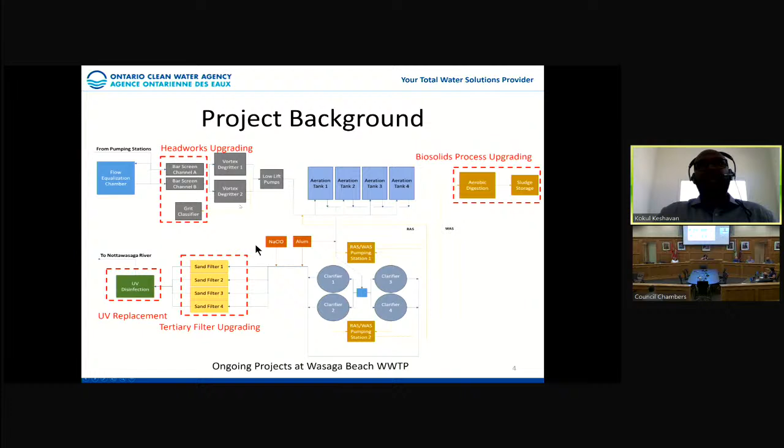So the boxes you see outlined in red here are ongoing projects at Wasaga Beach. The goal of these projects is to replace any old equipment with new equipment, and also ensure that the equipment meets the rated capacity and the future needs of the plant.

The first task was a site visit and collecting the background information that's needed. Once we had all the data, we did a plant assessment to assess the existing condition and capacity of all unit processes. Then we developed a roadmap for the next 30 years, from 2021 to 2050. That was summarized in a report, and today I'm giving you a presentation just to highlight the key findings from the study.

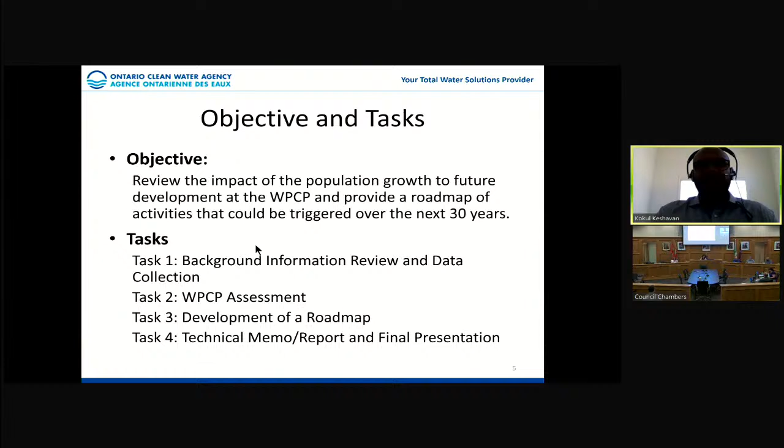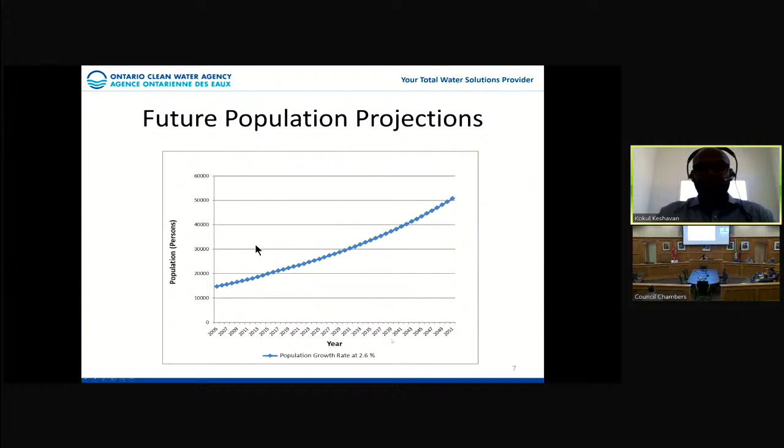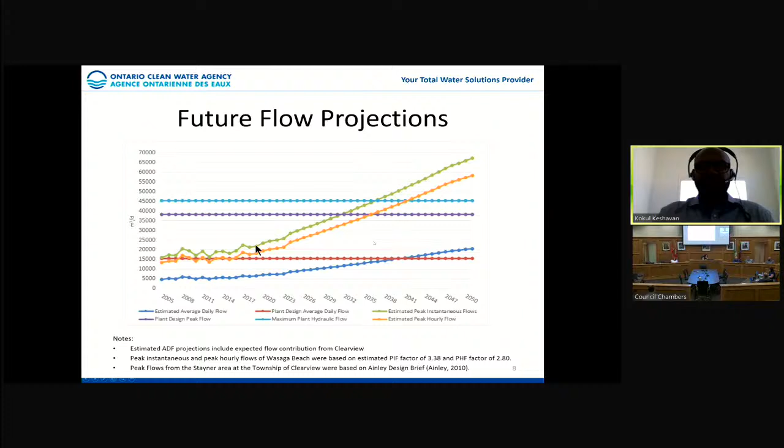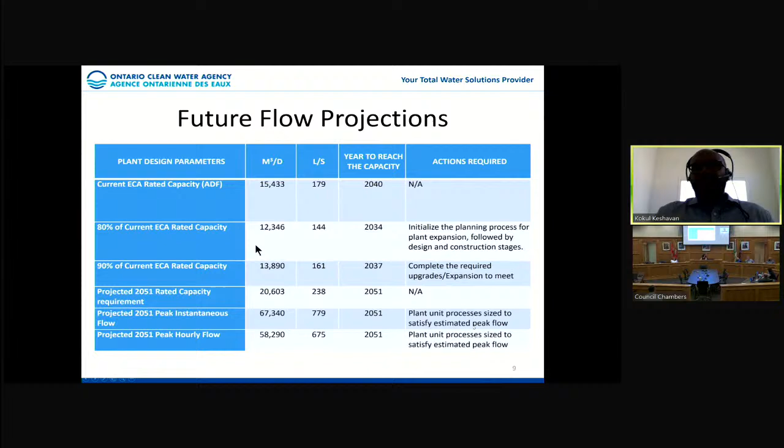The rated capacity in 2051 is expected to be just over 20,000. The peak instantaneous and peak hourly flows in 2051 are expected to be about 67 and 58 MLD respectively. So it's important to ensure we're sizing the downstream processes in the plant for these peak flows.

Peak flow reduction considerations: since there are such high peak flows at Wasaga Beach, we've done some consideration to reducing these peak flows and not oversizing downstream equipment. Primarily we'll be doing that through utilization of the flow equalization tank. There's one existing at Wasaga Beach, about 2,000 meters cubed, currently not being used for flow equalization. However, the purpose of this tank is...

If there are peak flows coming into the plant that the downstream unit process can't handle, it would divert the flows into this tank, and the flows would then be sent back into the plant during low flow demand periods. So this acts as peak shaving.

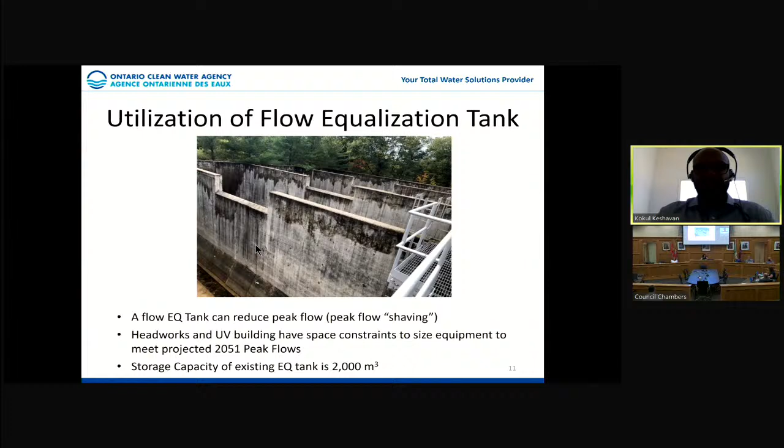There are a few projects ongoing right now, specifically the headworks and UV system upgrades. We're involved with CIMA for the design stages, and during the design we realized there are space constraints to size this equipment to meet that 2051 peak flow requirement. Because of that, SEMA looked at two options, which were reviewed by OCWA.

The first option would be to divert flows over 67 MLD to the flow EQ tank. That 67 MLD comes from the estimated peak instantaneous flow in 2051.

Option 2 would be to divert flows over 46 MLD. This was chosen based on SEMA's review during the design stages—this is the max capacity we can put in for the UV system with the available building space, and also the headworks 46 MLD screens are recommended based on space constraints as well.

We looked at these two flow scenarios, and what we did was look at the max flow day event in 2021, which was in September, and projected that into 2051 to simulate how flows would look and how the existing EQ tank would hold up.

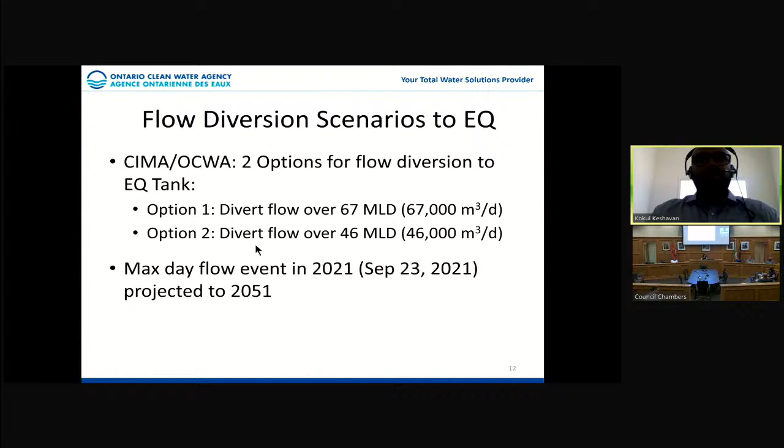Remember, we have a 2,000 meters cubed equalization tank, so there would be no issues here. However, we would have to incur high costs to have very large screens and UV systems, and also some building modifications to account for those.

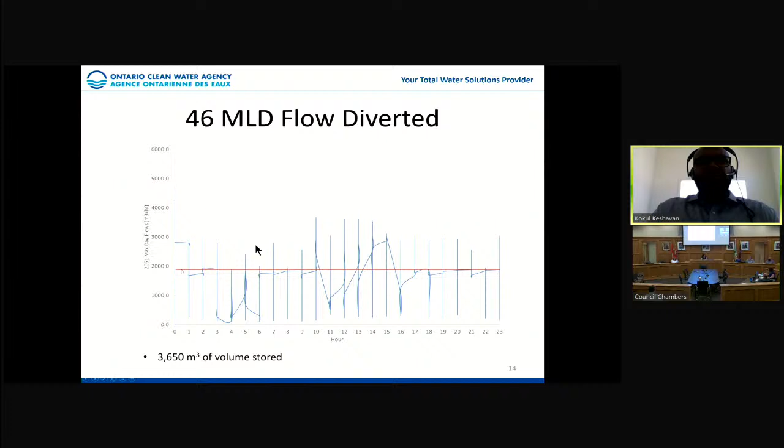Looking at the 46 MLD scenario, you can see the threshold is a lot lower, so there's a lot more flow that needs to be diverted. In this scenario, 3,650 meters cubed of volume was stored in the tank, which is greater than the 2,000 we have available. So in this option 2 scenario, we would require an EQ tank expansion.

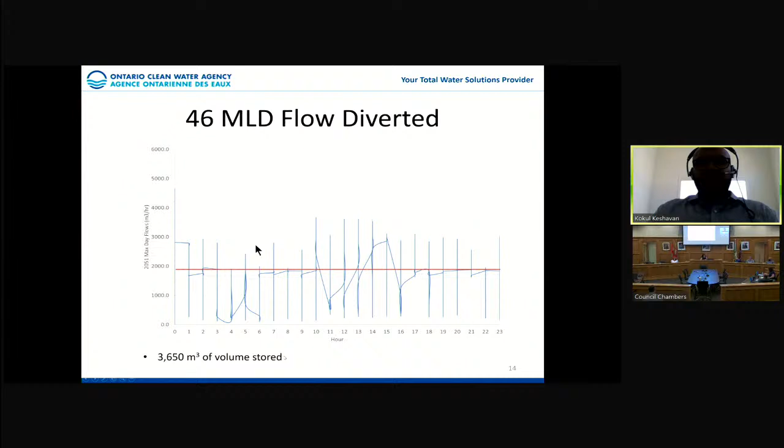So ultimately, we've decided to go with utilization of the equalization tank and diverting flows over 46 MLD. The reason being, as I mentioned, the UV system max capacity is 46 MLD. We've discussed with the designer CIMA and also Trojan, the supplier.

If we want to go anything beyond this, we would have to create a parallel channel, which would require some trenching, and then we would need to do a building expansion to house that channel. So quite a bit of cost associated with that.

CIMA recommended option 2 because the size for the headwork screens, based on the channel depths and the configuration of the headworks, 46 MLD having 2 screens like that is optimal. Going any bigger would require serious modification of the channel and the building.

So we've been approved to go ahead with option 2 for diverting flows over 46 MLD, and our roadmap study is actually based on this direction. Essentially, peak flow shaving allows for reduction of downstream unit treatment processes, leading to significant cost savings.

So the idea is to spend some money on the EQ tank, expand it, and utilize that. Spending that money would be cheaper than purchasing large equipment for the UV and the headworks, and also the significant building modifications that are required.

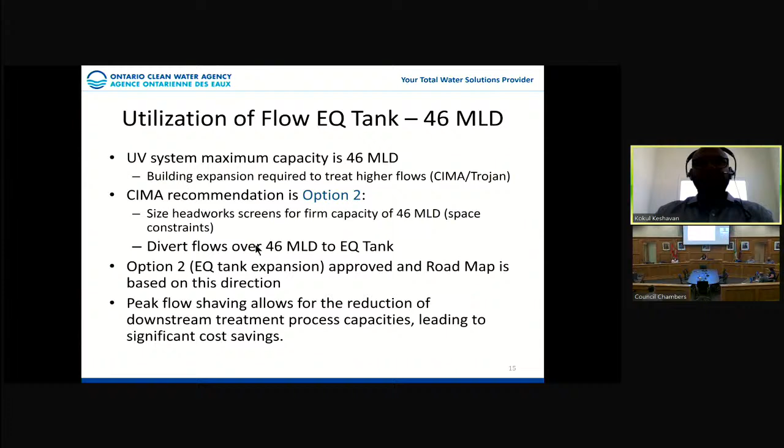So, treatment process capacity evaluation. Here we have a performance potential graph of the existing conditions at Wasaga Beach before any of the upgrades were complete. I'm sure a lot of you have seen these graphs in the past, but what we have here on the y-axis is each unit process, and on the x-axis is the flow in meters cubed per day.

What we've done is converted each of the individual unit processes to be equivalent based on average daily flow, so we can compare apples with apples, and compare each unit process with the rated capacity of the plant. The dotted line here is the last 3 full years of average day flows.

The red line is the rated capacity of the plant, which is about 15,400. The blue line here is what our projected 2051 design flow would be. Rated capacity is just above 20,000.

So looking at this, you can see the initial bottlenecks of the process currently are the tertiary sand filters and the aerobic digestion and sludge storage. We're actually doing 2 projects to address these right now.

Actually, the sand filter project, both of these 2 sand filters have been replaced and put into new disc filters, which has increased the capacity. So now that actually meets the rated capacity here.

And we're also doing a biosolids upgrade in 2 phases. The first phase will bring these to meet somewhere around 2031, and the second phase will have to be conducted to meet the rated capacity and the rest of the design.

Looking at the rest of the graph, you can see the bar screens we're going to be replacing because the existing ones are old. So that's an ongoing project in design stages. So this will be satisfied.

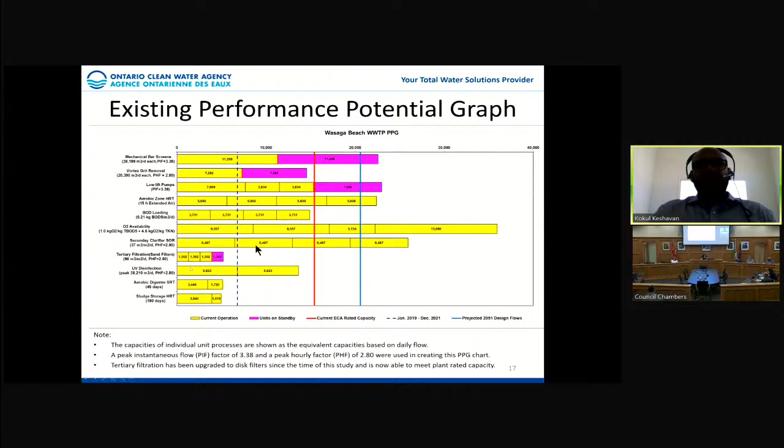So based on that, here we have a bird's eye view of the ongoing and proposed projects happening at Wasaga Beach. Everything in purple is ongoing, including the headworks bar screen replacement.

In this building we have the disc filters recently installed, and also the UV system that we're going to be replacing. Here we have the biosolids upgrade going on, where we're converting some of these sludge storage tanks to aerobic digesters and introducing sludge dewatering.

In the future, we can expect an additional sludge storage tank to meet the 180-day requirement. We're also looking at expanding this EQ tank and utilizing it for flow diversion control, so it can be used on a full-time basis.

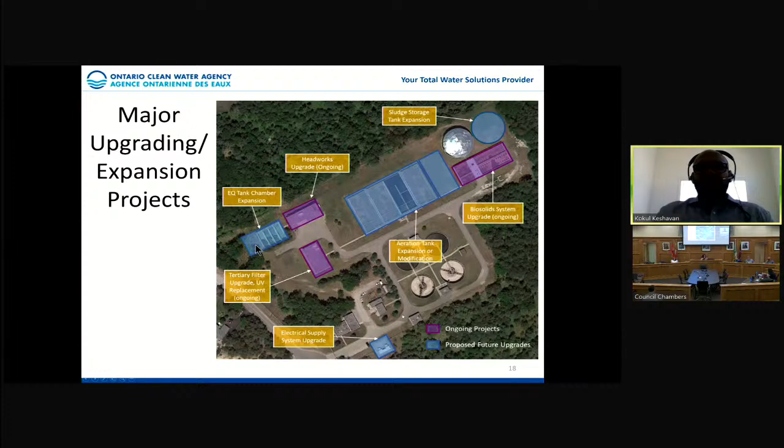For the aeration tank, we'll likely need an extra tank during the plant expansion to meet that BOD loading. Importantly, we also have the electrical supply system upgrade — as we put in these new technologies, we need to ensure the feed system can handle the electrical demand, and that the standby diesel generator is sized accordingly with all essential loads tied into it.

So, roadmap analysis and proposed timelines. Essentially, from our report, this is a summary of all the key projects and studies we're recommending to complete over the next 30 years.

The projects highlighted in pink are the ongoing projects, which I've already touched on, so I won't go into too much detail there.

Starting from the left, one project we recommend is automating the WAS pumps, and we should do that as soon as possible. Currently the pumps are manually wasted, so putting them on VFDs with automatic wasting would provide better control of the secondary system.

We also have a few studies recommended. I touched on the electrical system capacity study — we want to study what future generator we need and any electrical system upgrades based on these project trajectories.

We also recommended a study on the aeration and secondary clarifiers — just a tracer study based on our site visits and data collected. We suspect they may be short circuiting, so this is a small study to address any short circuiting concerns.

We also have an optional biosolids management optimization study. This is to evaluate different biosolids treatment options — a technical analysis, life cycle costs, and comparison of alternatives for converting biosolids to resources.

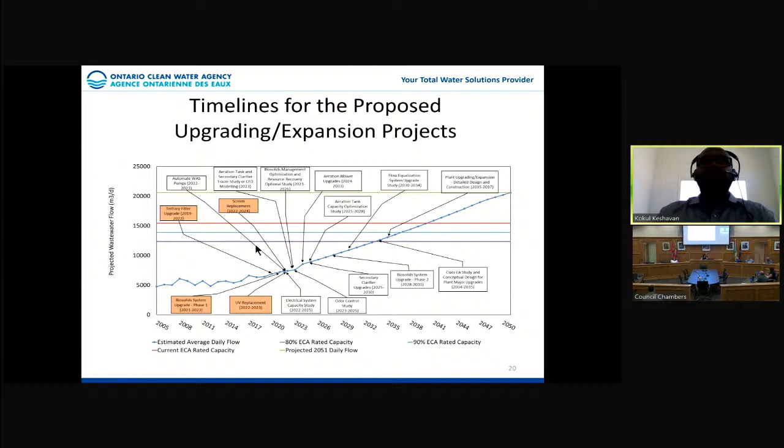So projects to meet the 2051 flow requirements - that's going to be the plant expansion project. In 2034 to 2035, we will be doing the Class EA and conceptual design for the plant. This is the procedure and studies that need to take place, typically costing around $200,000 to $350,000 in today's dollars, depending on the overall scope.

Once this Class EA and conceptual design is approved, we can start the detailed design shortly after, around 2035, and plan to have construction completed around the end of 2037.

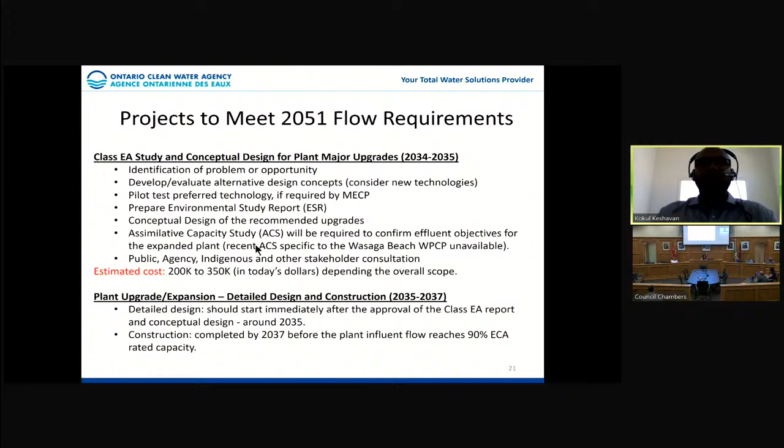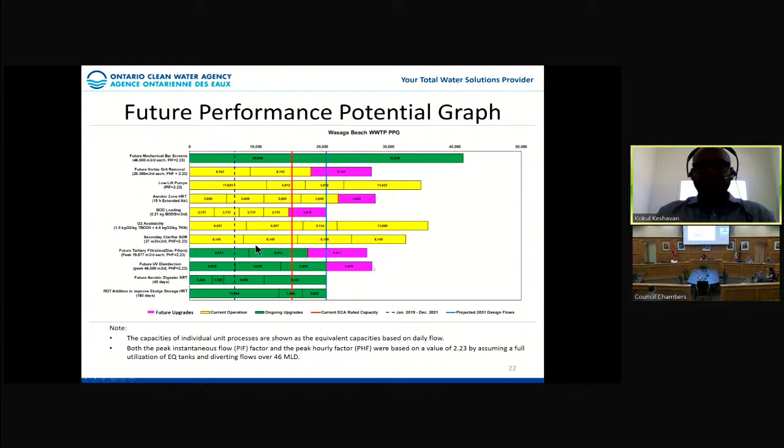So now this will be going over the equalization tank versus no equalization tank and the advantages. Here we just have the unit processes affected by peak flow - that's the headworks, vortex grit removal, low lift pumps, disc filters, and UV disinfection. Here we just have the capacities based on ongoing projects and what's existing there.

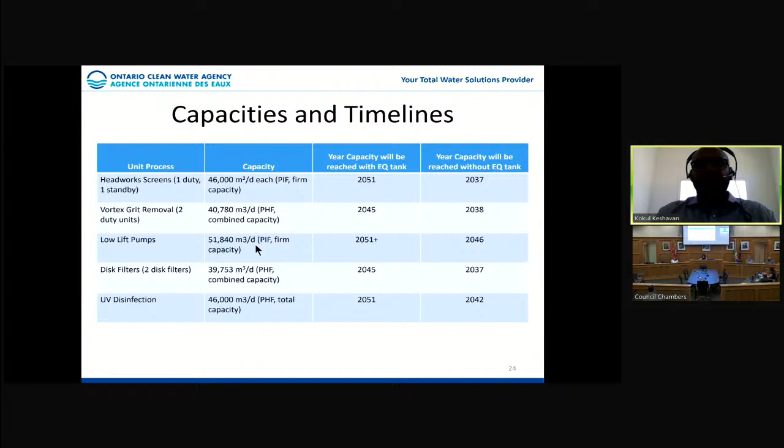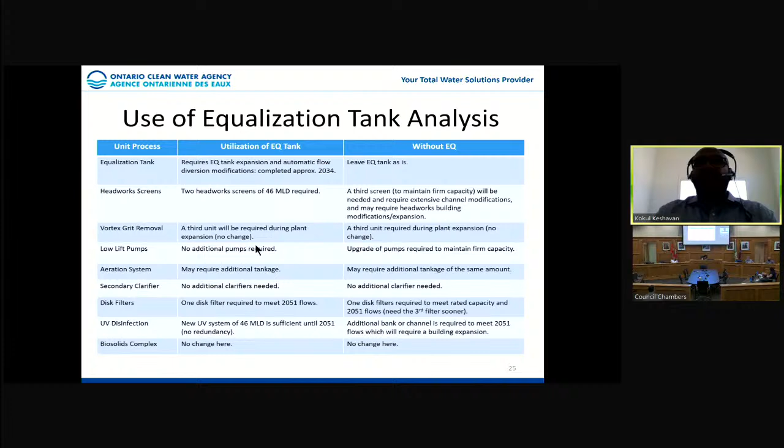So you can see the advantages of using an EQ tank in terms of timelines. This table here goes through each unit process and describes the benefits of what happens when you utilize the EQ tank versus not utilizing the EQ tank. However, for time's sake, I won't go through this. It's summarized well in this graph, where we have a magnitude of total cost comparing the EQ tank versus no EQ tank.

Everything in blue here is the total cost if you're utilizing the EQ tank. Everything in orange is what we see if we're not utilizing the EQ tank. So you can see if we use the equalization tank, there will be some costs associated with expanding it and allowing it for flow diversion control. However, on the headworks side, we're saving about 100% cost because of an extra channel and an extra unit that's required in some building modifications.

In terms of the vortex grit removal, there's no changes there - we're going to be needing a third one for the plant expansion. Low lift is a slight extra cost - if we don't have a tank, we need to convert one of those smaller pumps to a bigger pump to keep up the capacity. Disc filters, there's no change here, we'll need a third one regardless. It's the timing of when you need one that's a little bit different.

The big one here really is the UV disinfection that I mentioned. By utilizing the EQ tank, we're good for 46 MLD up to 2051. If not, around 2042, we would need to do a building expansion to build a parallel channel. So you can see the headworks and the UV disinfection - that's where the higher costs are.

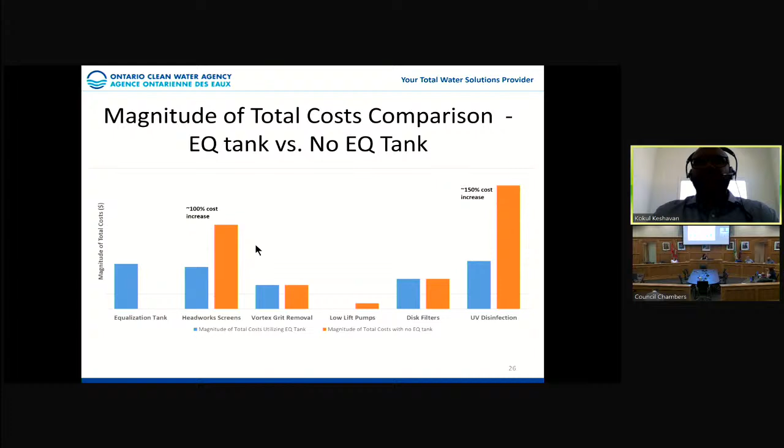I didn't put any specific numbers towards this just because the scope's not really defined at the moment without doing some studies. Also, we've been seeing some price escalations and market volatility - as of recent, you may all know, the cost of raw materials have been going up for metals. Seems to have calmed down, but we're also seeing fuel costs at historical highs. Due to all these combinations, the market volatility and inflation combined makes it very difficult to assume project costs at the moment.

So in summary, the bottlenecks of the process are the tertiary sand filters, aerobic digester, and sludge storage tanks. Completion of these ongoing projects will allow these key processes to meet the plant rated capacity requirements, except the aerobic digesters, where a second phase of the biosolids project needs to take place.

We proposed several studies. These studies will be recommended to be completed within the next 5 years, to help enhance plant treatment performance and also provide a good design basis for future plant expansions.

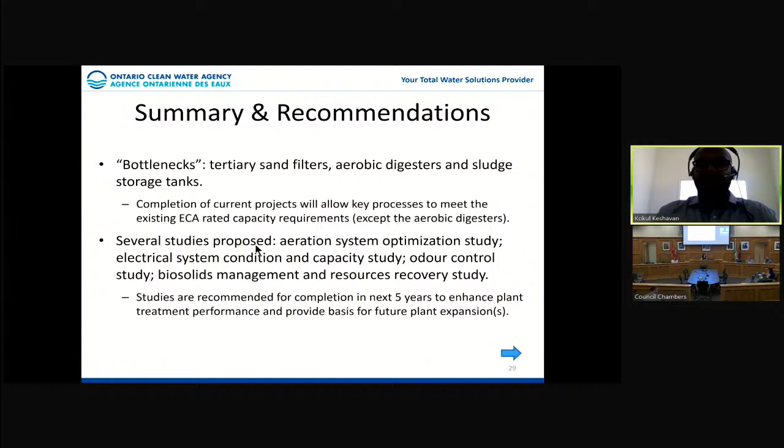Looking into the future, all major unit processes except the low lift pumps and secondary clarifiers have insufficient capacity to treat projected flows to 2051. So a Class EA and conceptual design to upgrade the plant should take place around 2034 to 2035 or earlier, depending on the population growth rate we see. The detailed design and construction should be completed around 2035 to 2037.

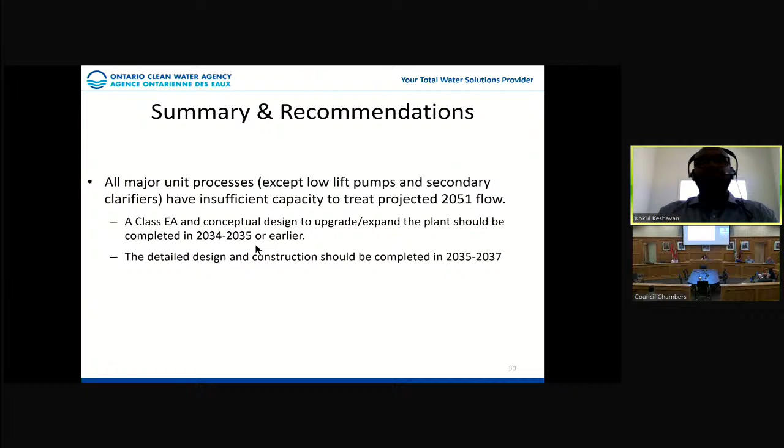That concludes the presentation. That's pretty much the summary and the highlights of that roadmap study. I'll just open the floor to any questions or clarifications you guys may have.

Thank you, Mr. Keshavan. It's hard to make wastewater exciting, and you did a great job. So I will open it to questions from the floor.

Councillor Belanger, please. Yes, thank you very much. I think a lot of us take our water and wastewater somewhat for granted. It's unfortunate that we can't get this kind of information to all of our residents because it's certainly complicated and costly. Thank you for a very detailed presentation. I do have just a couple of questions.

The 2034 year is proposed for starting the EA study and then the detailed study after. Is there any merit, given available grant funding—because we never know in any given year what grants become available to us, whether for planning or construction—that if there was an opportunity earlier, would we be in a position to do those studies earlier with other levels of government supporting that? And if those studies are done earlier, I'm assuming they probably need to be done to qualify for grant funding for actual construction. So I'm just asking about the flexibility—is the timing critical to what you need to plan, or could the plan be done earlier? Thank you.

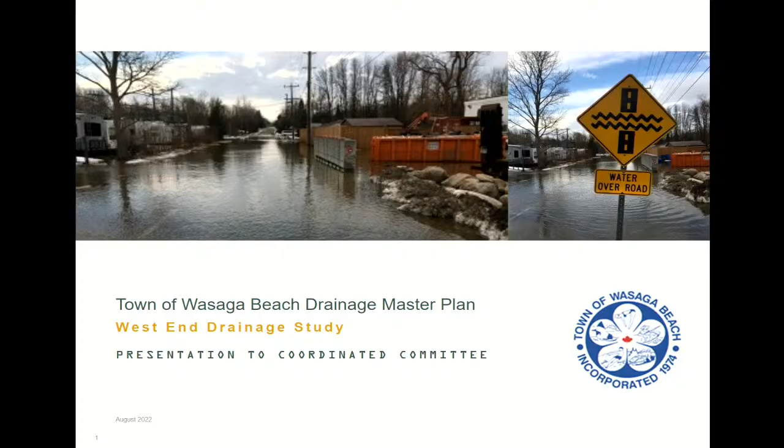I think we're all aware that there's been some historic flooding issues in the west end of the town, and during the October 26, 2021 council meeting, these issues were brought to council's attention. There was a deputation and a petition presented that identified and presented the flooding issues along Marilyn Avenue, George Street, Beachwood Road, and Robert Street.

In the petition, it was identified that there were 4 occasions of flooding over a 21-month period between January 2020 and September 2021, and 46 of the local residents signed the petition requesting that council assist with the resolution of the drainage deficiencies in the area, as well as the flooding that has been ongoing for some time.

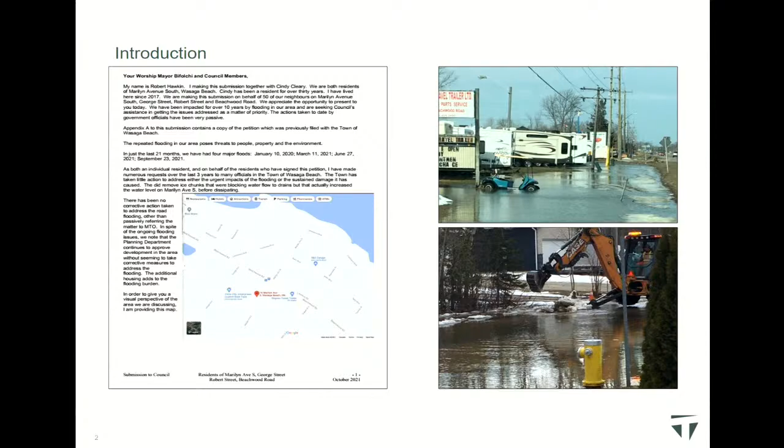In response to this, the town retained Tatham Engineering, who were currently completing the ongoing Master Drainage Plan for the town. The town retained us to further assess the existing drainage issues in this area, identify the extent of the flooding that is occurring, and develop solutions to address these deficiencies.

Following an approach recommended by the Nottawasaga Valley Conservation Authority, we developed models that predicted flooding consistent with the photos and reports presented by the public, as well as flooding that Tatham staff and town staff have witnessed on site in the past few years.

Essentially, Beachwood Road forms a barrier or an obstruction, a dam for lack of a better word, that restricts flows. Beachwood Road is higher than the lands to the south. The centerline profile grade is higher than the grades on private property, as well as Robert Street, Marilyn Avenue, and George Street. And the culverts that cross Beachwood do not have sufficient capacity to convey all flows downstream.

So during spring freshet and major storm events, water essentially backs up or builds up behind Beachwood Road, uses the existing ditches, and spreads out and floods the low-lying areas along these streets and along the properties south of Beachwood. Unfortunately, the conveyance systems downstream of Beachwood also have limiting capacity, and we see flooding along Constance Boulevard and private properties between Constance Boulevard and Georgian Bay.

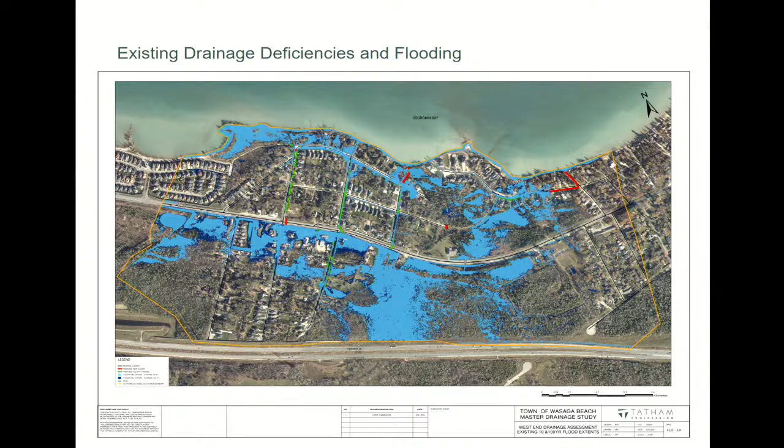As part of our analysis, we evaluated a number of options, a series of options, to try to come up with the best solution to identify and rectify the drainage issues and the flooding that is ongoing in this area.

Not only that, but in consideration of a number of ongoing studies in the area, including the West End Depot project, the Shore Lane Drainage Improvement Project, as well as the Constance Boulevard Drainage Improvements Environmental Assessment, we developed a series of recommended or preferred solutions and prioritized them in a list for implementation. They'll be presented on the series of maps I'll present next.

Our phase one is to improve the system along Marilyn Avenue South. Marilyn Avenue South does not have a proper drainage outlet at this point. Water tries to drain both east and west through the roadside ditch on the south side of Beachwood Road, but the ditch is fairly low sloped and undulating and doesn't have the positive grade to the nearest outlet. So to try to improve the drainage in this area, we're recommending that an outlet be constructed under Beachwood Road to the downstream conveyance system along Marilyn Avenue South.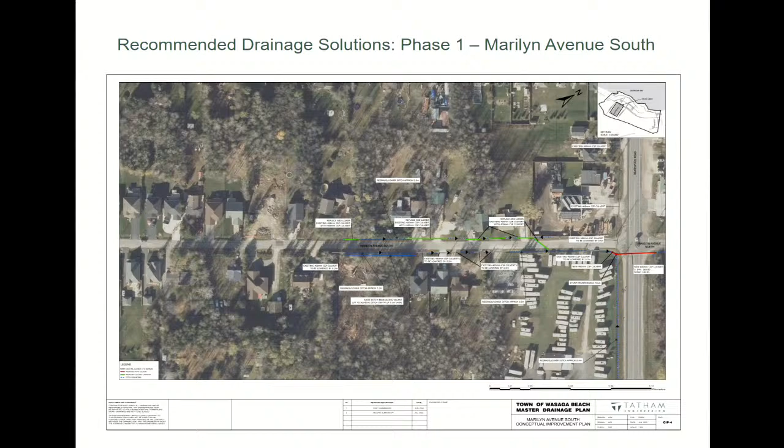Regardless of the outlet options, we're still recommending improvements to the ditches, roadside driveway culverts, and roadside ditches to improve drainage conditions, provide positive fall, and reduce flooding. This is still part of phase one works, because we'd recommend starting from the downstream end when doing drainage improvements and working your way upstream, to make sure downstream drainage systems have the capacity to convey flow from upstream improvements.

If we proceed with the minimum size MTO culvert, which is a 600 millimeter diameter culvert, the downstream roadside ditches and driveway culverts and the outlet to Georgian Bay would not have sufficient capacity to convey the flows that the 600 culvert conveys—they're all smaller size culverts. So improvements along Marilyn Avenue North would be required so that we don't transfer a flooding problem on the south side of Beechwood Road to the north side.

However, if the MTO is in favor of putting in smaller culverts, the 300 millimeter diameter culverts that we've also evaluated, then the downstream system would have sufficient capacity and we wouldn't have to do the improvements along Marilyn Avenue North.

The other item to keep in mind when we speak of Marilyn Avenue is there are high groundwater levels in the area. If we have to put in a 600 millimeter diameter culvert, we may actually lower the ditch to an elevation that intercepts the groundwater, and we may have groundwater seepage that continually flows through this system. If that is encountered, we'd recommend changing that 600 millimeter diameter culvert to a 600 millimeter diameter storm sewer to eliminate that groundwater seepage into the system.

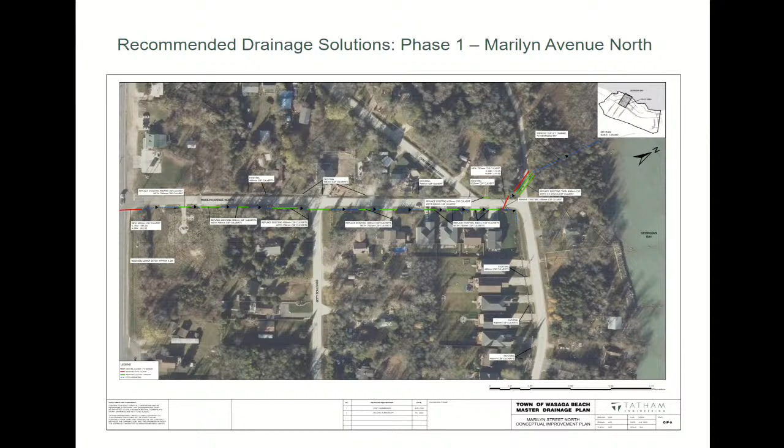Phase two would be looking at improving the crossing culvert, the Beechwood Road crossing culvert that drains downstream to Bayswater Drive, and improving the Bayswater Drive drainage system to Georgian Bay. Right now that system is working fairly well, but as we increase the capacity of the culvert under Beechwood Road, it would then be undersized and we would have to make improvements.

The other challenge with this area is the roadside ditch side slopes are at fairly steep slopes, and there's a narrow road allowance. The width of the road allowance is, I believe, 17 meters, so there's not a lot of room to deepen or widen a ditch and increase the capacity of the system.

So in this area we'd be recommending a portion be enclosed in a storm sewer, so that we can eliminate the steep slopes of the ditch and still have the conveyance capacity to convey the upstream flows. The other improvements would just be to clean out the outlet and outlet culverts—they generally have capacity, they've just silted in and have some debris and material that can be cleaned out. So that would be phase two of the works.

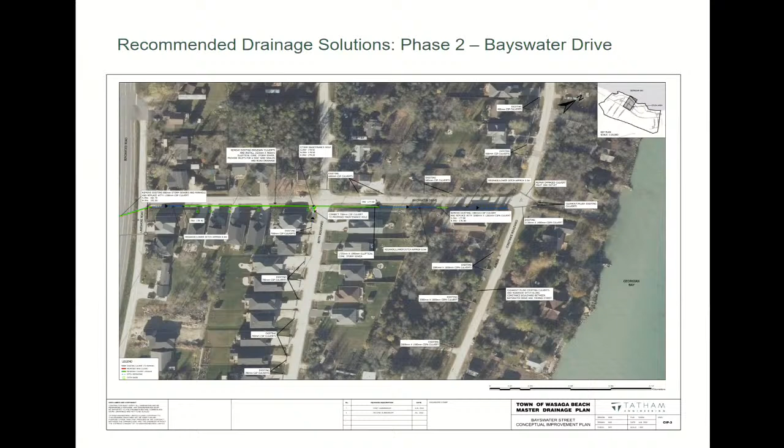Phase three is then upstream of Bayswater on Robert Street, and again, once the outlet is improved across Beechwood Road, we'd be looking at making some roadside ditch and culvert improvements to convey the flow from Robert Street to Beechwood Road and to the new outlet.

Now, there are a number of locations along Robert Street where local residents, as part of their lot grading, have created channels that pull water from the water course, shown at the bottom of this page. This pulls water to the roadside ditch, so this is an area where we're seeing a significant quantity of flow entering the municipal drainage system and making its way towards Beechwood. Improving the ditch through this area will increase its capacity and certainly reduce the amount of flooding—both the frequency and extent—that occurs in this area.

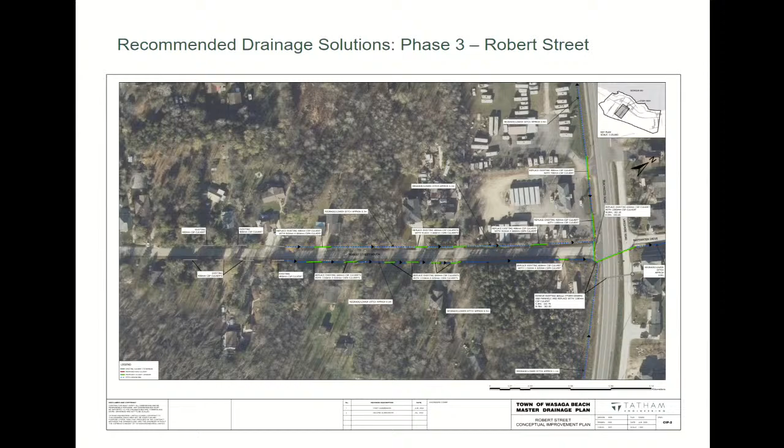Phase 4 of the recommended solutions goes hand in hand with the Constance Boulevard outlet EA that is ongoing. There are currently improvements recommended at the downstream end of Constance Boulevard. That EA isn't final, but there are considerations for improving or installing a new drainage outlet through private property to Georgian Bay. We certainly recommend that as an option or a solution to improve the conveyance capacity of the drainage systems in this area, and we've included it as part of our recommended solution.

Recognizing we have a new outlet, we're able to send more flow through the Thomas Street drainage system by increasing the culvert crossing on Beechwood Road and the culvert crossings and roadside ditch between Beechwood Road and Constance Boulevard.

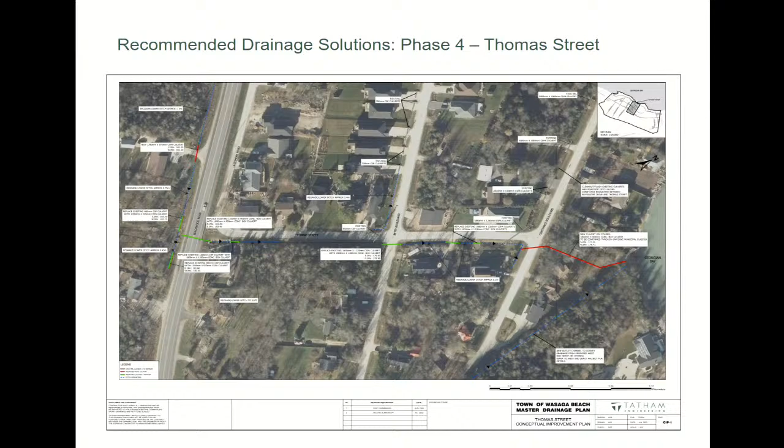Phase 5 of the works is to improve George Avenue's roadside ditches and culverts to reduce some local drainage issues, but more importantly to improve the drainage system along Beechwood Road by improving the ditch grades and cross section as well as the culvert crossings. This will help equalize the flow as it hits Beechwood Road. I mentioned that it forms an obstruction and water backs up behind the road. This will help the water spread out and equalize and use each of the new outlets being installed, so that we convey the flow and reduce flooding in the area upstream of Beechwood.

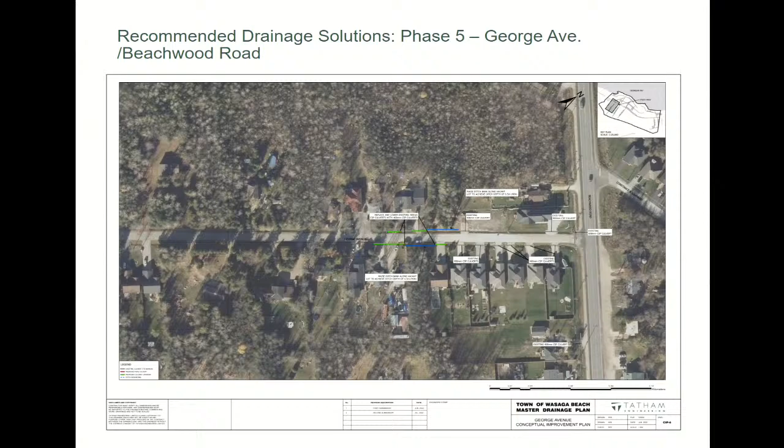So although we're not eliminating all flooding, some areas we can't because they are rear lot drainage issues where the rear lots are lower than the road grade and the municipal drainage systems. They're really lot grading deficiencies. But for the most part, water that gets into the municipal system is collected and conveyed by the roadside ditches and culverts without flooding private property, and conveyed to Georgian Bay.

So there is a significant improvement, specifically along Robert Street, Marilyn Avenue, and George Avenue, and in the areas downstream. We did a similar analysis for the once-in-a-lifetime storm, or a 1 in 100 year return frequency design storm, and we're seeing very similar results where flooding isn't entirely eliminated, but there are significant improvements, and that flooding is generally restricted to low-lying areas and rear yards or areas with grading deficiencies.

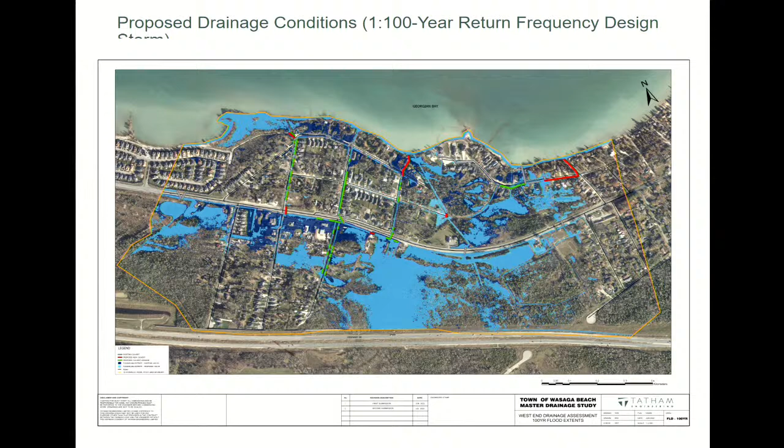As part of our work, we also estimated probable construction costs for each phase. For Marilyn Avenue, if we proceed with the MTO recommended or minimum size culvert, the 600 diameter culvert, we would then have to improve the downstream systems, and that project, phase 1 of construction, would have an estimated cost of just over $600,000.

On Bayswater, to include the storm sewer, add a new outlet, and clean up the downstream end would cost roughly $935,000. The ditching and culvert improvements on Robert Street would cost roughly $345,000. Thomas Street would have a price tag of $750,000. And George Avenue, along with the drainage improvements on George Avenue and Beechwood Road, would cost roughly $360,000, bringing the total to just under $3 million.

Now, there are still discussions ongoing with the MTO about what they will accept for some of the culvert crossings. On Marilyn Avenue, if the MTO will accept a substandard crossing and allow for 300 millimeter diameter culverts, there would be a cost savings of roughly $300,000, as we wouldn't have to improve all the downstream system north of Beechwood Road. Unfortunately, if they don't agree to it and we encounter high groundwater conditions, replacing that 600 millimeter diameter culvert with a storm sewer would add $30,000 to the overall costs.

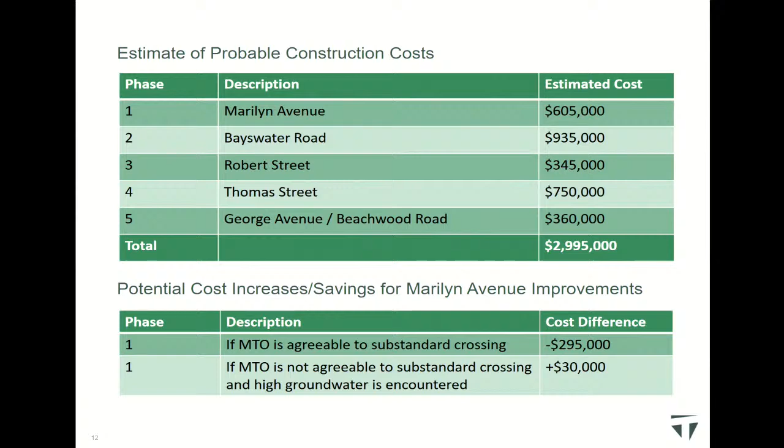So at this point, we have prepared the recommended solution and presented that to the town. And that concludes my presentation. Is there any questions?

All right, thank you very much for your presentation. I will open it up right now to comments from the table. Councillor Blanchet, go ahead.

Thank you, Chair Foster. Just a couple questions. One, in Phase 2 for Bayswater Road, you indicated either a portion storm sewers or clean out. I'm not, you're the expert, but if you put in a storm sewer, then future clean out wouldn't be required, I'm assuming. If you did a clean out, then that has to be done on an ongoing basis.

Yeah, sorry, what I meant was, I would suggest that half of the road between Beachwood and Constance would be storm sewer. The other half of the road would remain roadside ditch. And the clean out I was referring to is the outlet itself between Constance Boulevard and George and Bay right now has some sediment buildup. The culverts have some debris inside them. The culverts are adequately sized, they don't necessarily need to be replaced, they just need to be flushed and cleaned out, and that area cleaned out.